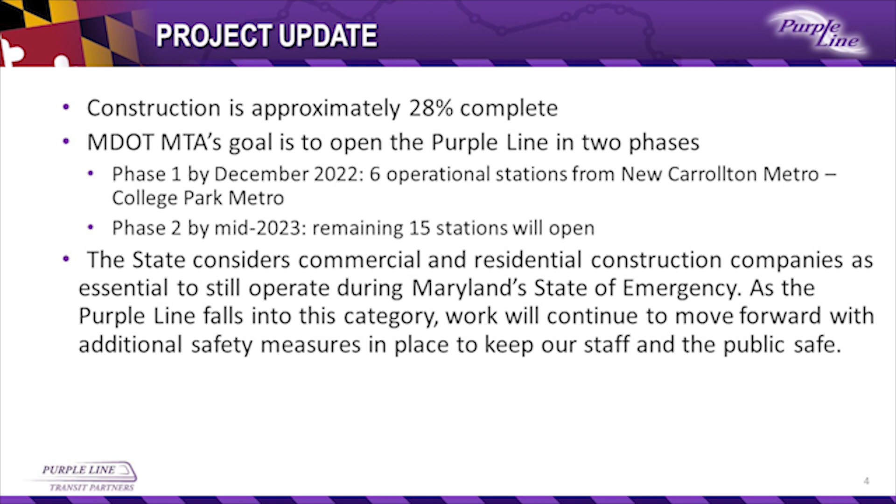The state considers commercial and residential construction companies as essential to still operate during Maryland's state of emergency. As the Purple Line falls into this category, work will continue to move forward with additional safety measures in place to keep our staff and our neighbors safe.

The first light rail vehicle is 60% through testing in Elmira, New York. It'll head to the Glenridge Operations and Maintenance Facility in Prince George's County for local testing later this year.

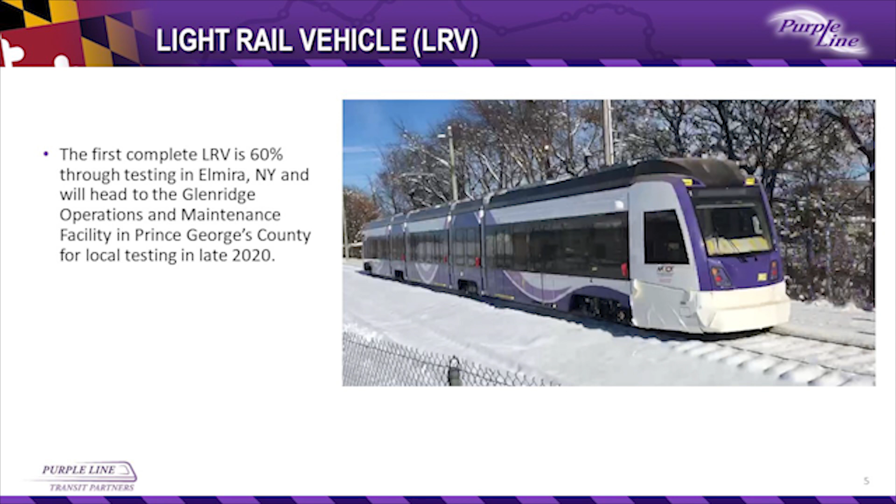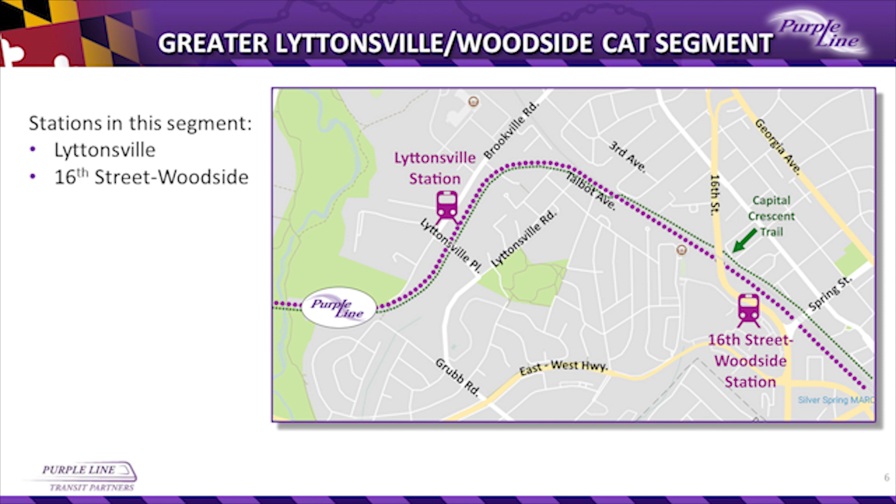Hello, everyone. My name is Carla Julian, and I am with Purple Line Transit Constructors, managing our community outreach and public affairs. Thanks for joining the Greater Lyttonsville and Woodside CAT presentation. Today, we're going to take a look at the Lyttonsville station and the 16th Street Woodside station.

Here you will see the Lyttonsville station rendering. This station is going to be a center platform that will be accessed from the Lyttonsville Place Bridge. The bridge will have commuter drop-off lanes in either direction. An elevator on the bridge will connect to the platform, and there is a ramp from the bridge to the Capital Crescent Trail and the station.

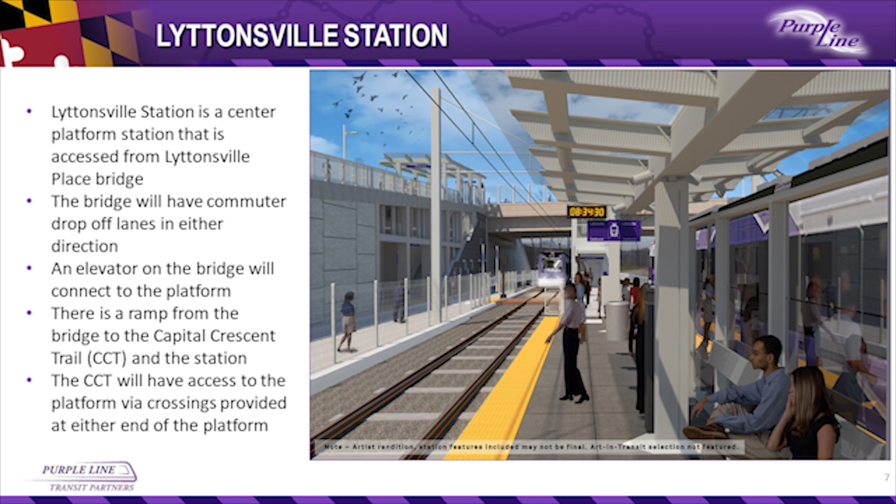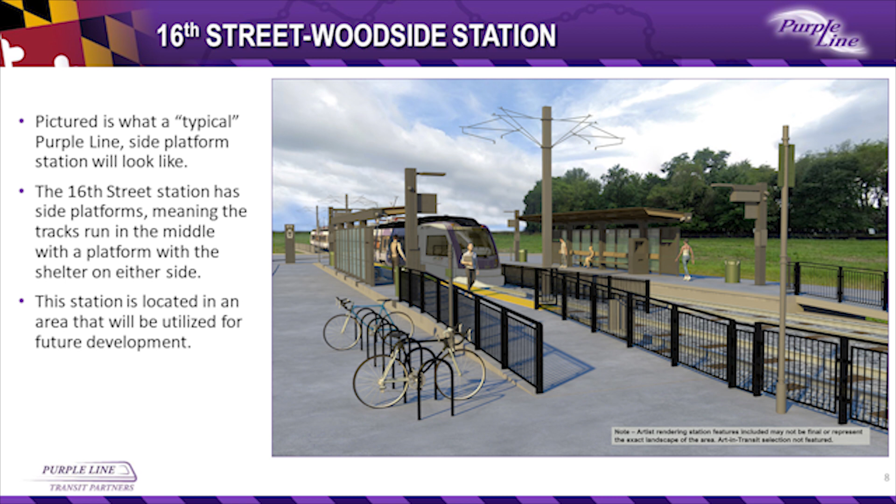The Capital Crescent Trail will have access to the platform via crossings provided at either end of the platform. Here you see pictured a typical Purple Line station with a side platform. This is what the 16th Street Woodside station will look like. The station will have tracks that run in the middle with a platform with a shelter on either side. This station will be located in an area that will be utilized for future development.

Hi, my name is Mark Edsel. I'm the project engineer for Area 1. We've come a long way over the past 6 months. The mild winter allowed us to progress a lot of the work in many of the areas.

At Rock Creek, we completed the mass excavation on the west side. We are continuing with the excavation on the east side, and that should continue through the summer. We also installed a temporary bridge from the east trail side over to the west bank, which will allow us to work on the slope stabilization on the west side.

We continued the construction of the LRV abutments and completed both of those. We have been installing some storm drainage in that area, and in mid to late April, we set the tub girders, which are shown in this picture right here, that'll span Rock Creek for the new train.

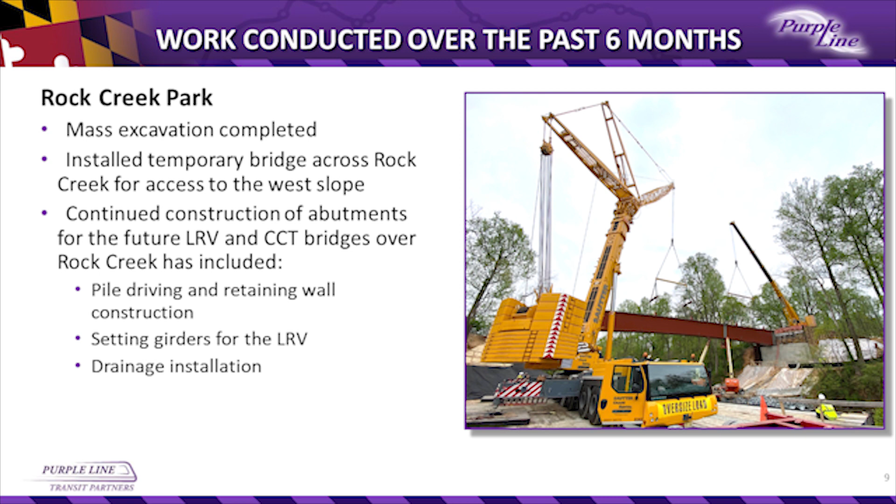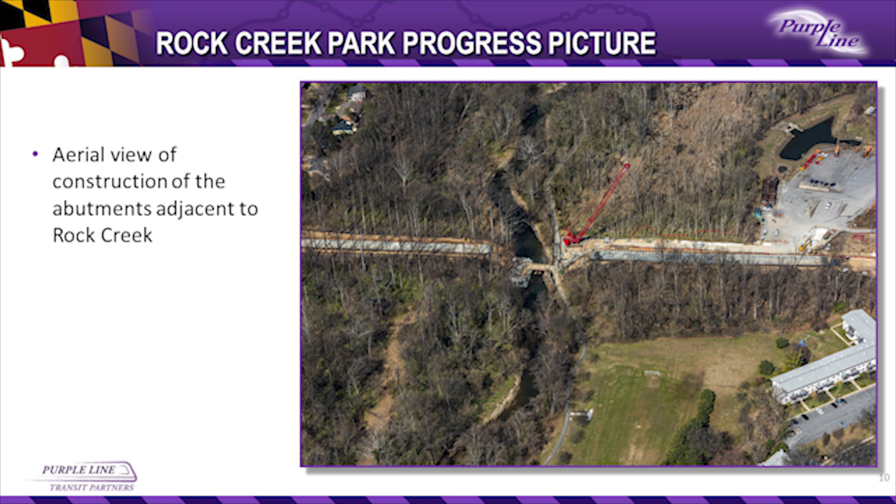What you see there is a 600-ton crane in the foreground, and in the background is a 500-ton crane that was used also. This aerial photo here is of Rock Creek. What you see there is our 300-ton crane that was used to service the abutments during construction and also help with the setting of the temporary bridge going over to the west side there.

Here at Lyttonsville Place, we completed the water main relocation along Brookville Road. As of this date, we actually completed the sanitary sewer relocation that goes under the Lyttonsville Place Bridge. We are also continuing with the storm drain work in this area and have various stages of retaining wall construction going on. At Stewart Avenue, we completed one section of the drainage in this area, and we've also completed the overhead utility relocation.

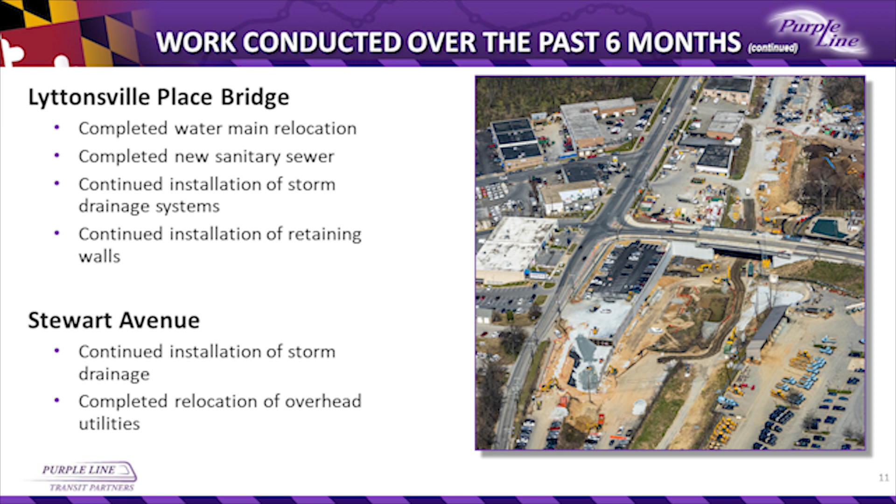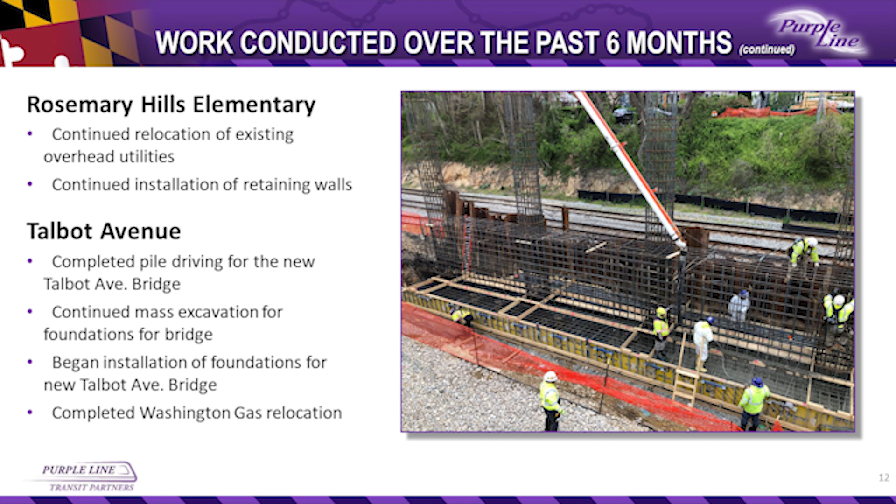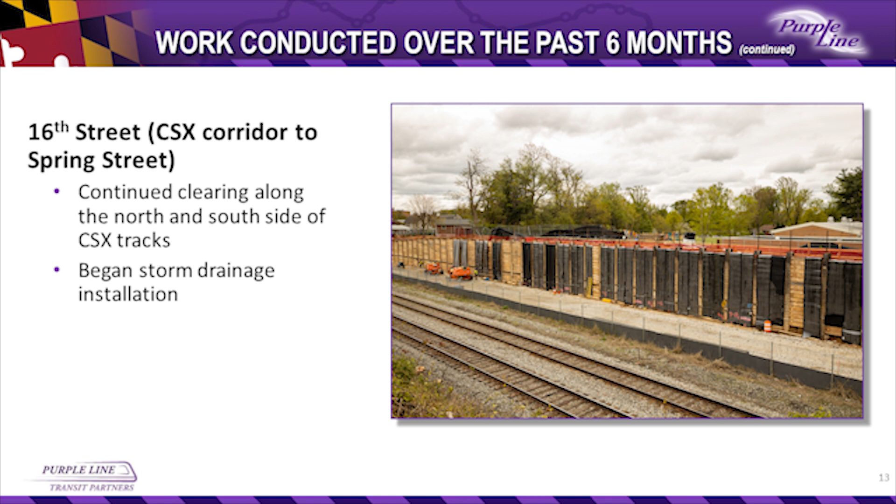16th Street over to Spring Street, we continue with the clearing on the north side and the south side of the CSX tracks. We began the storm drain installation along 4th Avenue and the drainage relocation along the south side where the old Silver Spring shopping center was, along 16th Street.

Looking ahead over the next 6 months through October, we'll be completing the CCT abutment construction. We'll be working on the storm drain on the west side and the east side of Rock Creek. We'll be installing the slope protection on both sides as well and completing the in-stream work there to remove those temporary culverts and the temporary bridge.

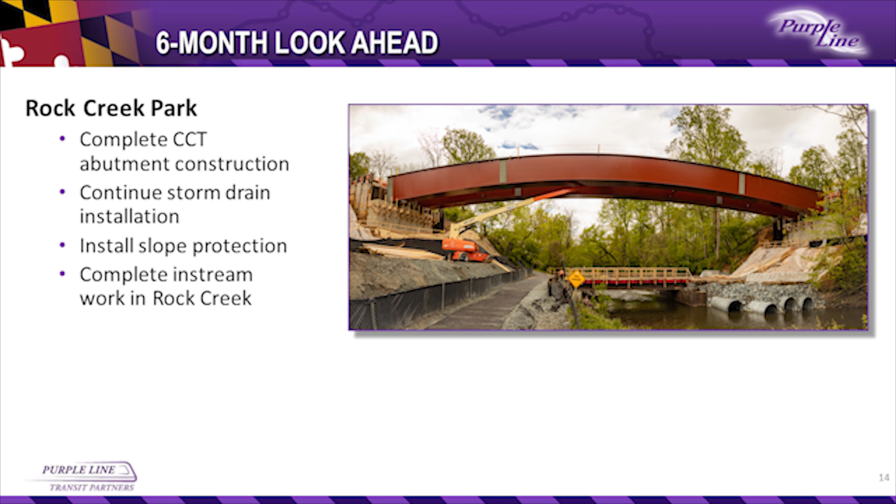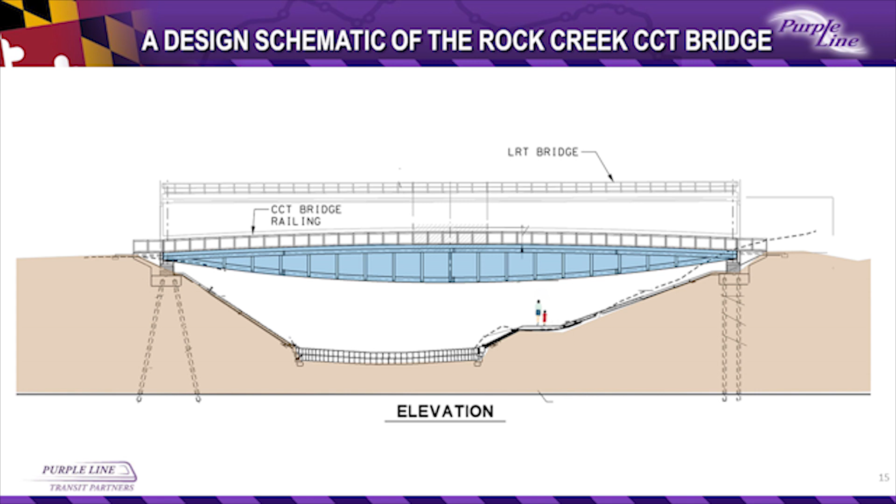All right, this is a schematic of the CCT trail. The new truss, as you can see, is lower than the tub girders that we just recently set. This truss should be installed in mid to late December of 2020.

Moving on to Lyttonsville Place, we will continue with the storm drain work, continue also with the installation of various retaining walls through this area. We'll begin pile driving for the Lyttonsville station, at which time we will obviously notify the public when we do that. We'll also begin the foundation work for the OMF building, which runs along Brookville Road.

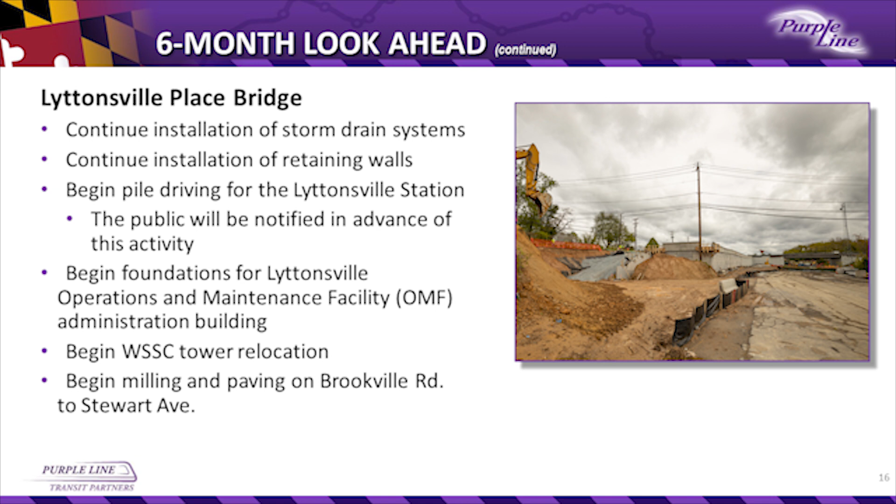We expect to begin the WSSC tower relocation, and in late summer we should be milling and repaving Brookville Road to Stewart Avenue. At Stewart Avenue, we will complete all the drainage work that we can install right now, and we will begin various cast-in-place retaining walls and some other types of retaining walls as well.

At Talbot Avenue, with the gas main relocated, we can now relocate the water and the sewer. That should go on for the next probably 2 months. We'll begin the installation of the retaining walls for the new Talbot Avenue alignment, and we'll be driving sheet piles from Talbot Avenue through the 16th Street area for the crash wall.

We'll be completing the substructure work for Talbot Avenue Bridge and installing the girders sometime from mid-June to early July. We expect to complete construction of the Talbot Avenue Bridge in the September, October timeframe.

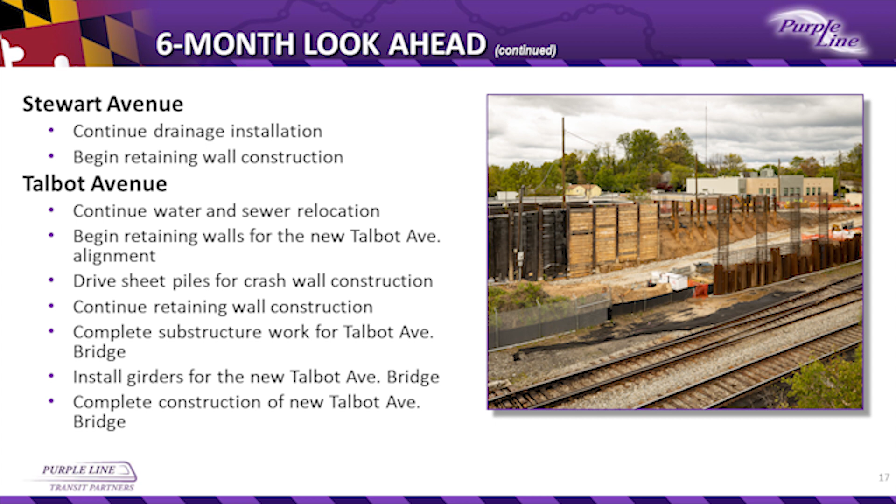From the 16th Street corridor to Spring Street, we'll be continuing on with the sheet pile installation and beginning the crash wall construction. The crash wall is the wall that will be between our tracks and the CSX tracks. We'll also be doing the mass excavation for retaining walls and beginning the various retaining walls through this area. We also begin the water main relocation at Bradford Place, that's at 8600 16th Street.

We'll be installing the storm drainage along the south side of the CSX tracks, including a 72-inch jack and bore that will go under both CSX and the WMATA rails. We'll also be installing a sewer jack and bore, a 10-inch sewer line that'll be running under the tracks as well.

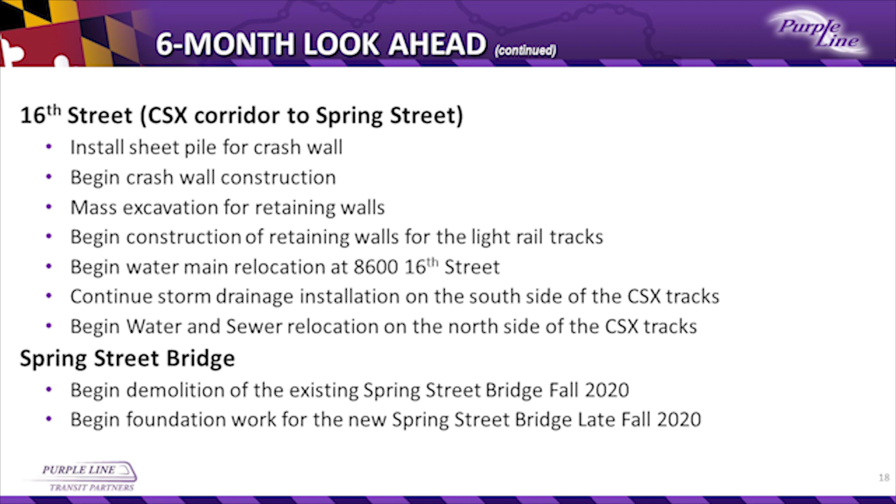At Spring Street, the demo and reconstruction of the Spring Street Bridge, we have actually delayed that a little bit. That will now start in late fall. The foundation work will begin probably early winter of 2020.

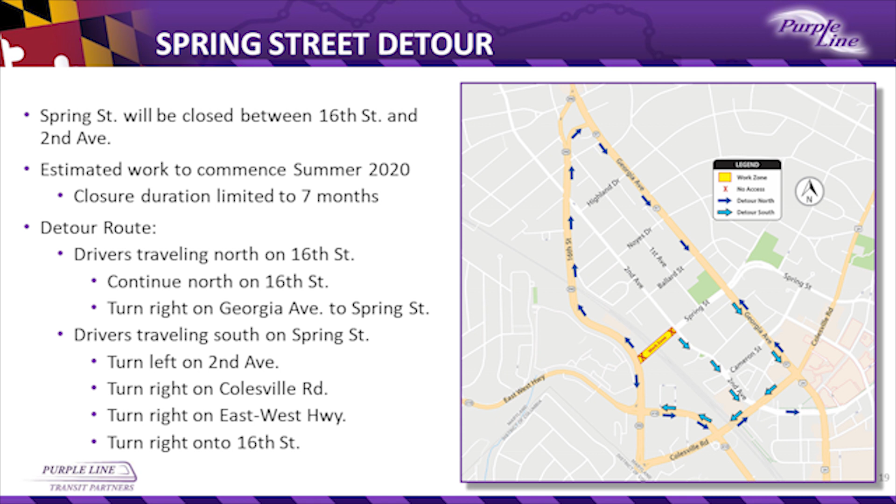This graphic here is going to be the Spring Street detour. As we get closer to installing this detour, we'll provide more information on it, but this is the same detour that we talked about in the spring CATS meeting.

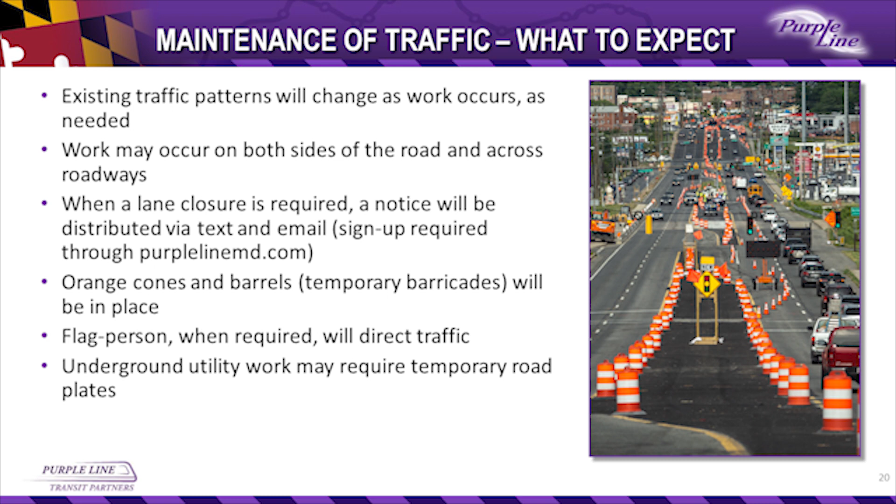Lane closure information will be distributed via text and email, and if you're signed up for our notifications through Purple Line MD, you should be receiving those. You're going to see orange cones and barrels and other types of temporary barricades. So just make sure when you're driving that you're not texting and you're staying very alert to move safely through those work zones.